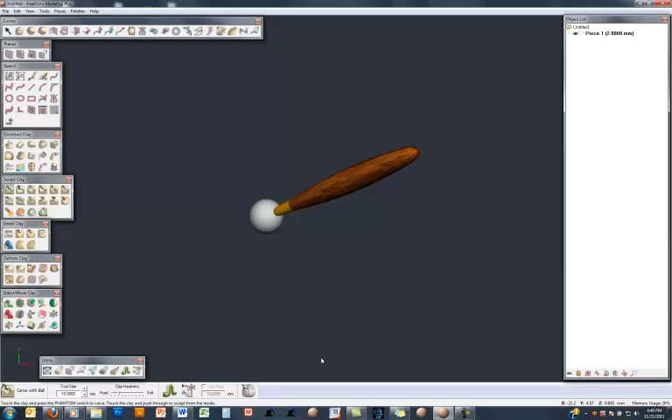In this video we're going to take a look at the new curves command. Now we've always had the ability in Freeform to create curves and edit those curves.

Whereas now we also have the ability, when we're creating a curve, down here on the bar, to click on the curve spheres option. Now when I make my curve, you can see how we have some spheres equally distributed along that curve. I can edit that curve and you see the spheres update.

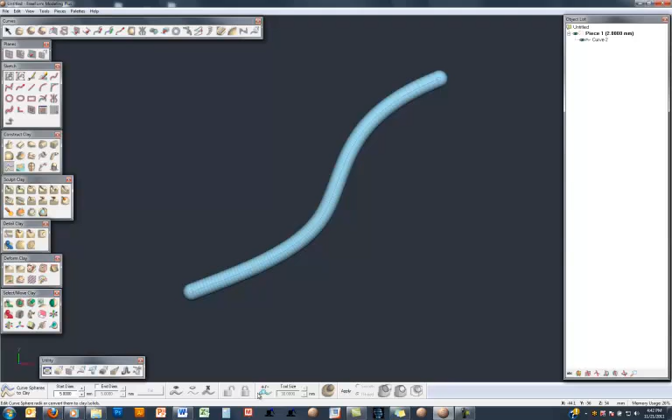Now if I come down to my construct clay toolbox and go to my new tool, curve spheres to clay, I can now come down to the bar. I'm going to go straight to this option in the middle, edit spheres.

Now by default, if I hold down the button on my stylus and move the cursor along, you can see how by default the spheres are shrinking. If I hold down the shift key, you can see how the spheres are actually getting bigger. If I hold down my control, that's a smooth operation, so that will smooth out the distribution.

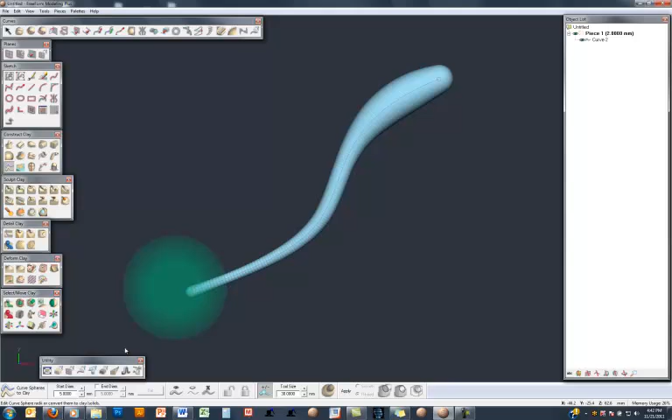Let's add a little bit more at the end here. By default again it shrinks. Now you can see down here at the lower end of the curve we don't really have enough spheres, so with the Alt key I can add spheres.

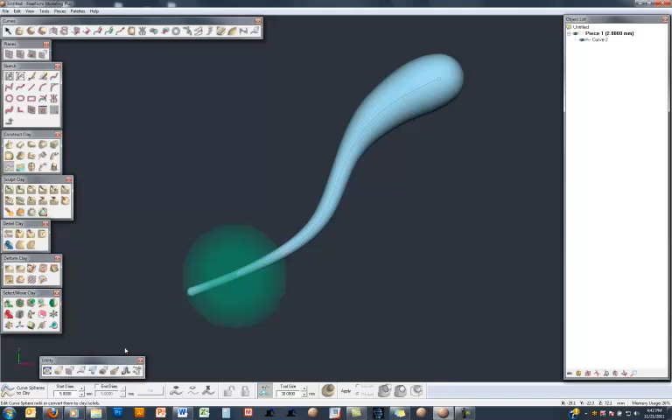Again with the control I can smooth. But if you have too many spheres, and it's possible to get too many, with Shift and Alt you can actually take the spheres away as well. Then come back to Control and do a little bit of smoothing.

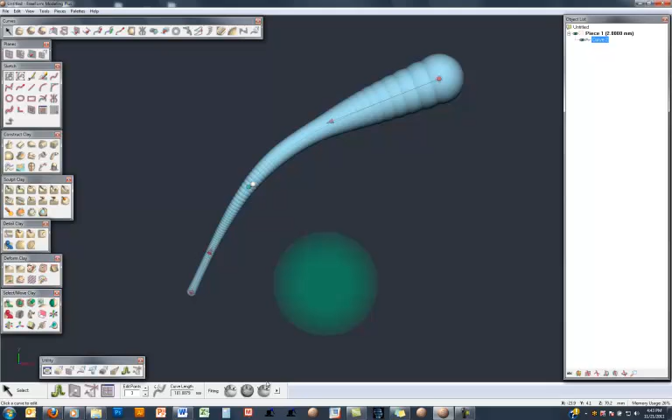And of course I can still come back to my edit command and edit this curve around, and the curved spheres go with it.

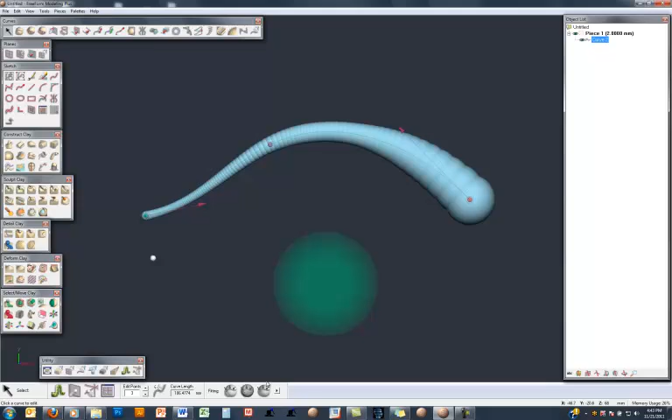Now what I can also do back in my curve spheres to clay command, if I switch off the edit spheres, I can select that curve, and now I can convert this curve sphere curve directly into clay.

So I'll pick a clay coarseness. Right now I'm going to go with the ribbed option and just hit combine into. There's the curve spheres converted into clay with the ribbed option.

If I undo that, I'll click on the smooth option. And there you can see the result, it's smoothed out that ribbing.

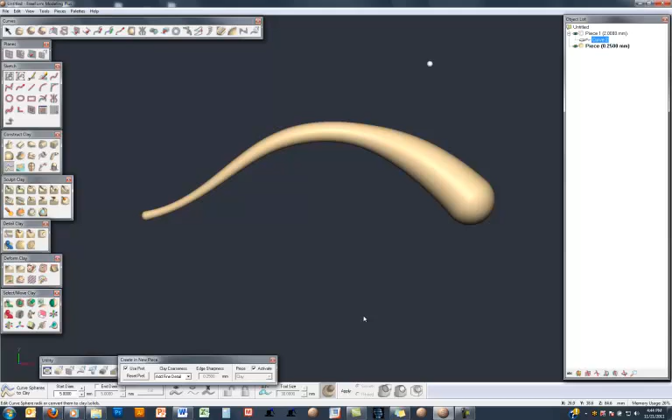I'll go back to my curve and edit that, and then just pull this around a little bit. And then go back and convert the curve again into clay. And there you can see the result.

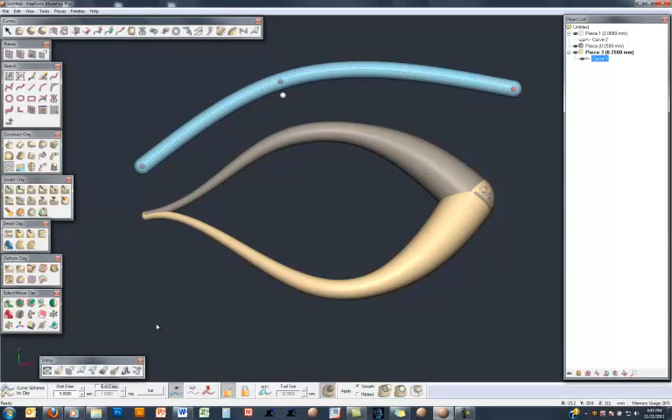Now if I didn't have any curve spheres built onto a curve, I can always go down into my curve spheres to clay command, click on that curve. I'm going to turn off the options here, and then I have the ability here to show the spheres and switch them on. So there you can see you can also add curve spheres to existing curves as well.

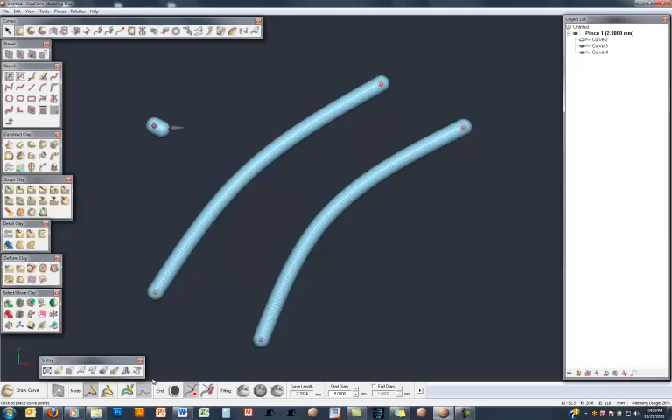Now I'll get rid of these curves and delete these pieces. One word of warning when you're using this command: we can have a situation like this where we have curve spheres crossing other curve spheres, and we come down and do an edit operation.

Edit the spheres, and you can see that as I'm editing the curve spheres in the curve in the front, the underlying curves are also being changed as well, and you might not want that to happen.

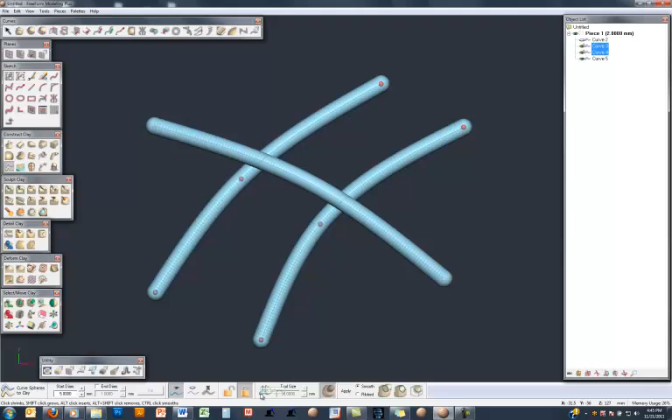So what we can do is click on the two curves that we don't want to change, and then down here on the bar we have a lock option. So we switch on the lock, go back to edit spheres, and now when I edit the spheres on the front curve, you can see that the underlying curves don't change.

So here's a more complex example. If we come to a side view, it's immediately obvious this is a squirrel. But if I come down to the curve spheres to clay command, select all these curves, then what I can do is actually hide the spheres.

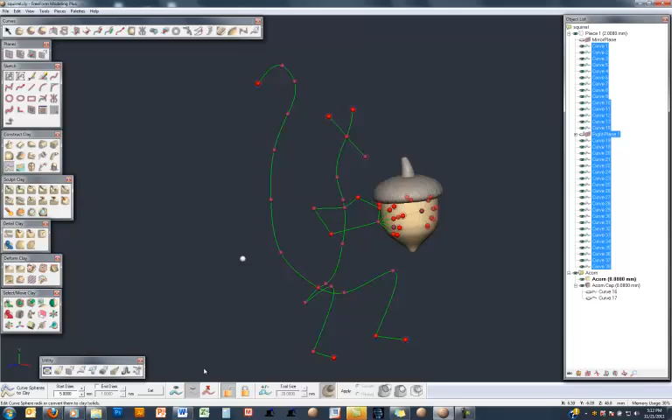And there you see the underlying curve structure. It's very simple. But as soon as I add those spheres, you can see how we bulk out, rough out this form very quickly.

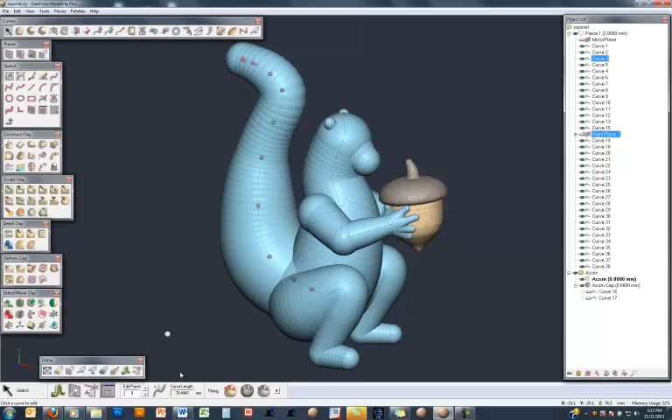But we still have the ability, if I was to go to edit curve for example, to then quickly start moving these curves around and editing the underlying shape and proportion before we convert this into clay to finish the sculpting. And that's a very simple and quick introduction to the new curve spheres commands.